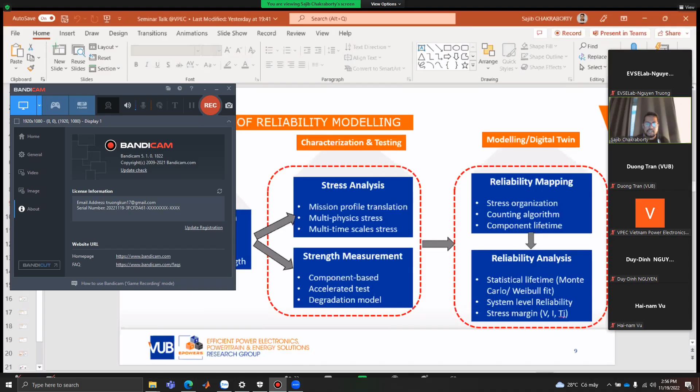And this is how the entire reliability map has been carried out in our lab. So the first aspect after failure identification, we say that the mission profile study has to give a very good coverage. That means what type of mission profile my device can encounter. In automotive applications, your device under test can face severe profiles due to the extreme behavior of the driver. The driver could be aggressive. The driver could have multiple scenarios that give different driving cycles,

and then your vehicle could have extreme payload. That means it is designed for maybe 1000 kilograms of payload, but sometimes it could carry more than twice, maybe 2000 or 3000 kilograms. So it is an example. Actually 1000 kilograms is nothing. It could be like 80 tons. If your vehicle is about to carry an 80 ton payload, sometimes the user may give it more than twice, like 180 tons of payload. So that also gives a different behavior for your device under test.

And then extreme weather. So your EV could run in Norway where it is minus 35 degrees centigrade, and the same EV could run in Saudi Arabia where the ambient is around 45 to 55 degrees centigrade. So this extreme behavior should also be taken into consideration when the lifetime study is carried out before the product goes to the production line.

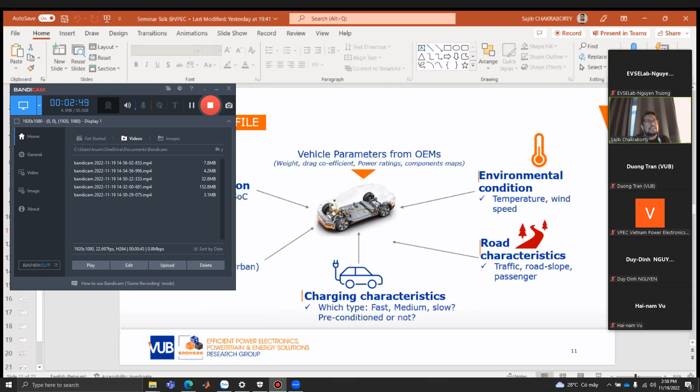And then also the charging characteristics. Like what are the characteristics that could trigger the fault, whether your EV is subjected to fast charging, medium charging or slow charging, whether there will be preconditioning after charging or not, whether there will be preheating before charging or not. So this could also trigger fault conditions.

Then also road characteristics, like the usual traffic that the vehicle encounters, the road slope, and the maximum and minimum number of passengers it could carry. Finally, the environmental conditions like the temperature and wind velocity also have to be taken into consideration when we look at the failures and the lifetime of the device under test, which is basically a power electronics component. So to identify the power electronics component's lifetime, all these factors need to be taken into consideration for the vehicle.

And when the vehicle is modeled, the parameters have to be taken from the OEM so that we have a very good idea about the weight, drag coefficient, power ratings, and the component maps. That means how much the components could carry in terms of power level, energy level, and also in terms of lifetime.

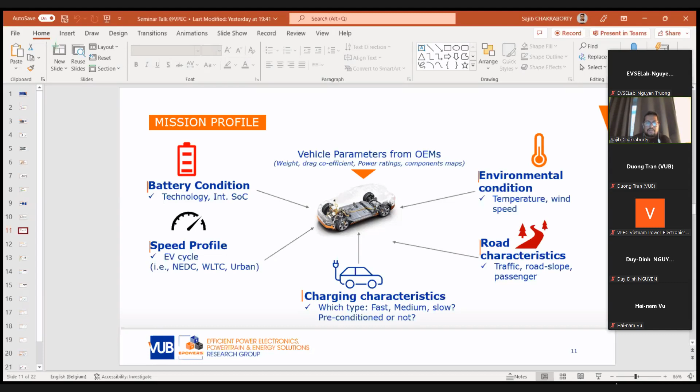So once the mission profile studies have been done, we have to go deeper. Now we will go into the device level loading. The mission profile is the upper level, the subject for the vehicles. Then we come into the device level loading, the loading applied to your DUT, and in this case the DUT is a power electronics converter. So again, the battery voltage based on the technology, whether it is NMC, LFP or LTO. If the battery voltage changes, the input voltage of the device under test also changes.

Then the load profile, which means the power request to the component. Then the coolant profile, the ambient temperature applied on your device under test. And finally the control strategy, the PWM control strategy, whether it is direct field oriented control, indirect field oriented control, or model predictive control. So based on the control strategy, the device under test could encounter different levels of stress. All this device level loading has an impact on the thermal cycling and the lifetime of the DUT.

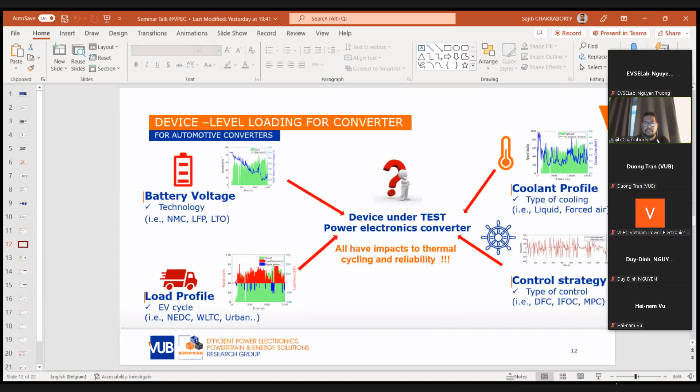Then we will give some classic examples from our study. So here we see two profiles. One is extra urban, one is urban. That means based on the mission profile, the speed, the load power, the coolant temperature is different. So here the speed in the two profiles is different. The coolant profile is different, and also the battery voltage is different.

So finally we see the electrothermal stress on the switch. That means the maximum junction temperature of the switch. In one case it reaches 100 degrees centigrade, in another case it reaches around 130 degrees centigrade. So it is the same switch, the same DUT, facing different mission profiles giving different electrothermal stress on the switch.

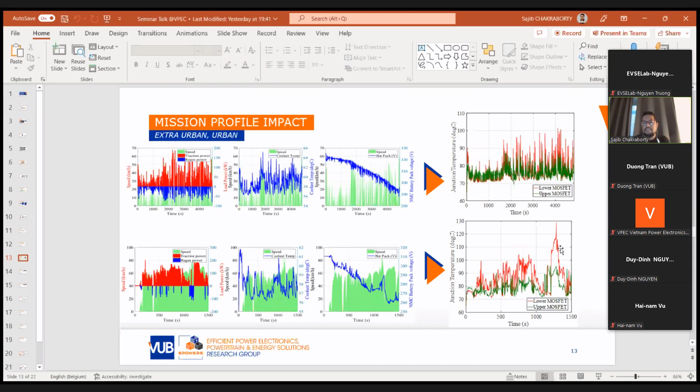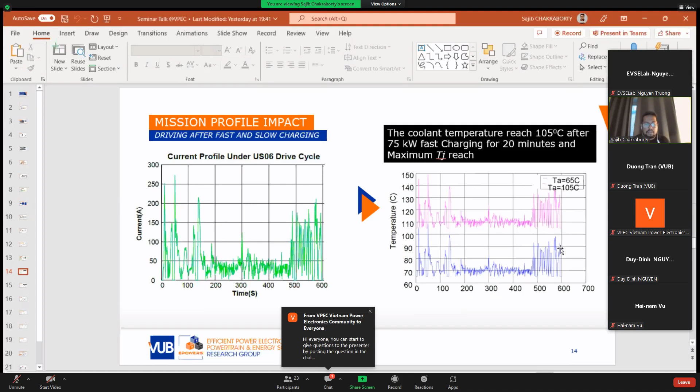Then this is another example. It is the same EV and same inverter facing the same WLTC cycle, but the control of the inverter is different. In one case it is model predictive control, in another case it is indirect field oriented control, and the motor is subjected to the same torque level.

And what we see, for the same coolant profile, the MPC results in 1.7% lower IGBT temperature. That means if we apply model predictive control instead of indirect field oriented control, the maximum junction temperature on average is about 1.8% lower than when the inverter is subjected to indirect field oriented control. That means the control of the inverter also has a huge impact on the temperature profile of the device.

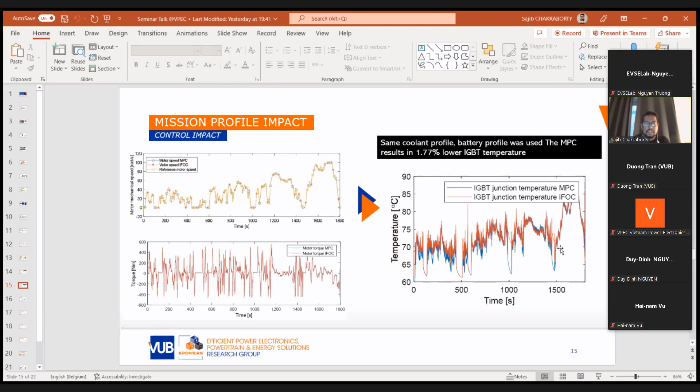So we see three classic examples. In one example, we see the impact of mission profile, that means the speed profile. In another one, we see the impact of different charging levels. In one case it is fast charging, in another case it is slow charging. And in the third case, we see the impact of the control on the temperatures.

Then this is our mission profile oriented reliability tool. We call it the RELAT tool for our EPOWERS. This tool takes all these mission profiles. Then we take the converter specifications and the EV load profiles. Based on that, we have different types of drivetrain models, whether it is an automotive car, a long haul bus or a long haul truck. Based on the drivetrain, we get the voltage level, the power request, and the coolant temperature for the converter.

And then based on the electrothermal model and the electromechanical model, we find out the stress during those mission profiles in the converters. After that, we give those profiles to the counting algorithms to count the number of cycles in terms of junction temperatures and in terms of temperature swings. Based on that, the accumulated damage is calculated.

So accumulated damage is actually one number, but all these things cannot be static, like your EV will not be subjected to one profile. That is why we mix uncertainty into the model. It could be uncertainty in the mission profile, in the converter parameters, or in the drivetrain models. So these uncertainties are given as a mix.

And then based on that we identify the behavior with Monte Carlo. That means what will be the fault in case of 100,000 samples. Out of this, we get a probability distribution function, which gives us that number. That means if it has 100,000 samples, what will be the lifetime of the components? And then based on the component association, that means how many components in series, how many components in parallel.

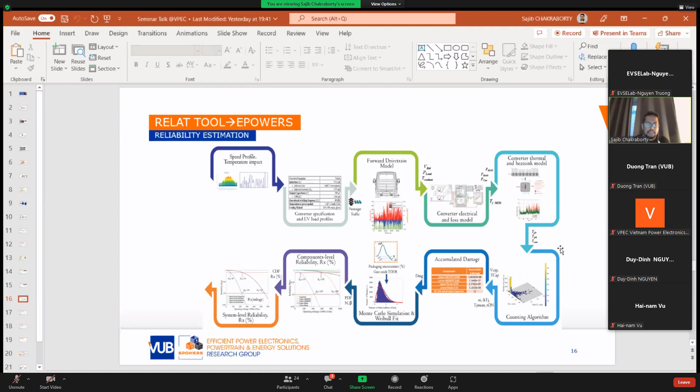Based on that, we calculated the cumulative functions, and after getting the cumulative differential functions, we identify what is the system level lifetime of this DUT if this is subjected to those profiles with this number of uncertainty. We can tell what is the reliability number of the DUT. So this is the software tool which takes into account many real field data and also many simulation data. Then we are given some use case examples.

This is the first use case where we will see what is the impact of mission profiles. So in this case, the DUT is a high voltage DC converter, and we see the same two profiles that we mentioned before. One is urban, the other one is extra-urban. And in this DC-DC converter, we consider one redundancy. That means if one leg is faulty or has a phase failure, the high voltage DC converter still carries out its functionality with less power, with less efficiency.

So we see the redundancy improves the lifetime almost around 4 times. And the same DUT, if it is subjected to urban, the lifetime is almost twice in comparison to extra-urban. So that means the mission profile and the redundancy have a huge impact on the lifetime of the automotive high voltage DC-DC converter.

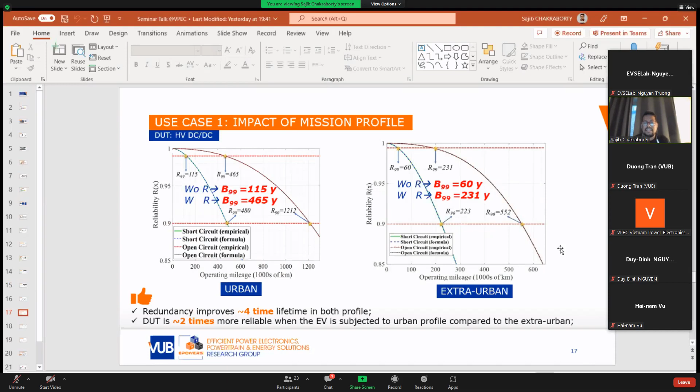Then this is use case result 2, where we will show the impact of the control. In that case, it is an inverter which encounters the same WLTC profile, the same requested torque is given. We see in the MPC, the inverter losses are really low. In some cases, the inverter losses go close to 0. But in IFOC, the inverter losses always remain at 400 watts. That means the inverter losses reduce around 26% in case of MPC.

But what we identified, it is really an interesting story. The IFOC resulted in almost 21% longer lifetime. Why does it happen? Because of the temperature swing. So the highest temperature may give you better lifetime if there is lower temperature swing. So if you really see, the IFOC never goes to zero. That means the temperature swing is very less in case of IFOC.

But when it is MPC, sometimes the losses go from like 1 kilowatt to 0 watt. That means there will be a huge temperature swing expected in the MPC, but in IFOC there is no such aggressive swing. So the lifetime in case of IFOC compared to MPC, which is almost 21%.

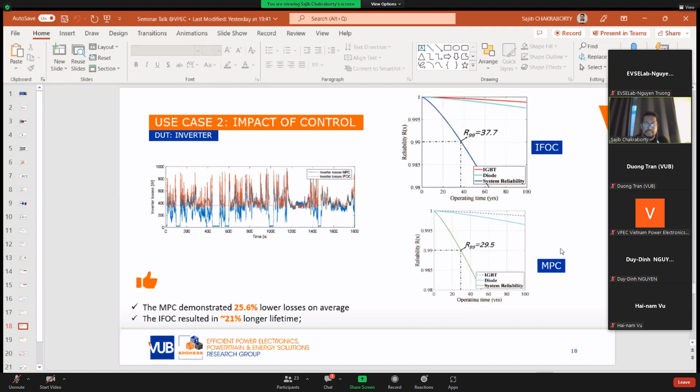So here is another example from the high level charging strategy. So one is charging with given power using conventional charging, going from 20% of SOC to 95% of SOC, and in another case we give a smart charging current request, and we see the smart charging current request improves the lifetime by 55%.

So I come almost to the close actually. So this is the new planned reliability research infrastructure, where we have an automated power cycling test bench, a mission profile data logger, high precision data capturing equipment like thermal camera, dSPACE, power analyzer, then LCR meter. We have cloud computing Hydra PC, and finally we also receive a power dynamic double pulse test analyzer.